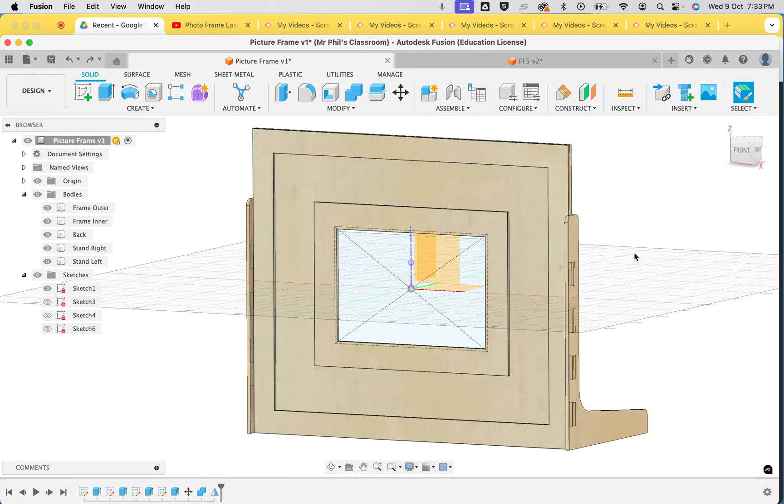Okay, so the last step in Fusion 360 before we export this to Adobe Illustrator, where we can do more of the artistic side of this project, is to change the parameters of this picture frame so it suits our needs. So I'll show you the picture I'm going to use.

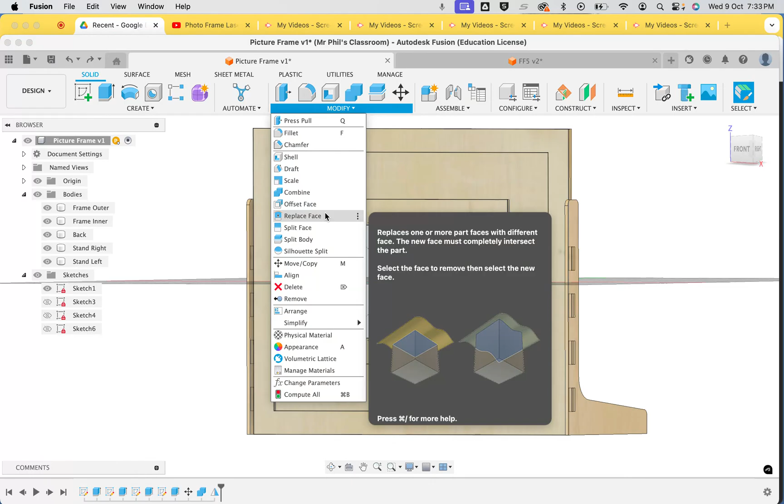...length is actually 176 millimeters, and the width here is 125 millimeters. So in Fusion, I'm going to go modify parameters. So I'm going to make the picture length 176, and I'm going to make the picture width 125.

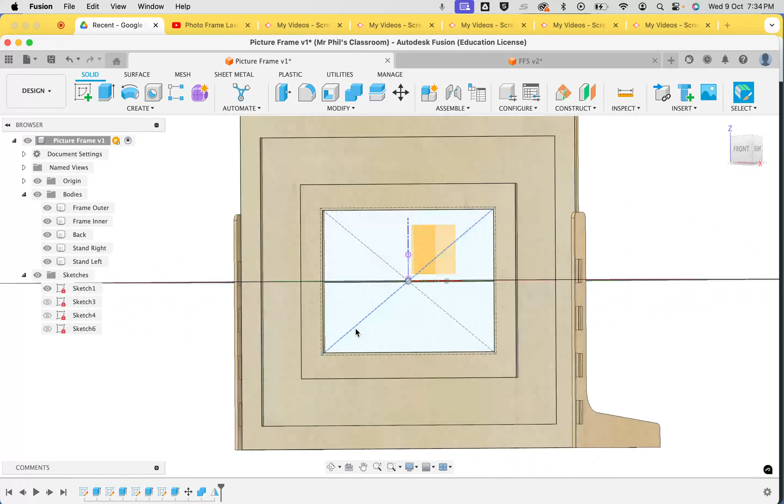And you can see now that the frame is actually changed to accommodate that height. Now that makes the frame look pretty big, so I'm going to actually go in here. I think what I'd like to do is I'm going to go get the art space.

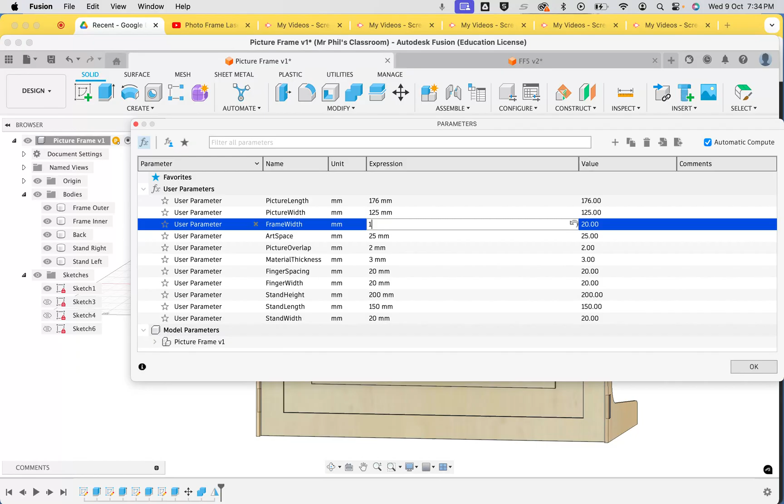I don't think I need that much art space, so I'm going to make the art space 30, maybe even 25. And what I might even do is get my frame width. I might go for like a 10 millimeter frame width. Let's see what that looks like. So that looks pretty good.

Now I'm not sure how this is going to work, but I'm thinking that my finger joints are now looking really kind of big and chunky there. So what I can now do, let's go modify parameters. And what I'll do is I'll go and change the spacing on the finger joints to 10.

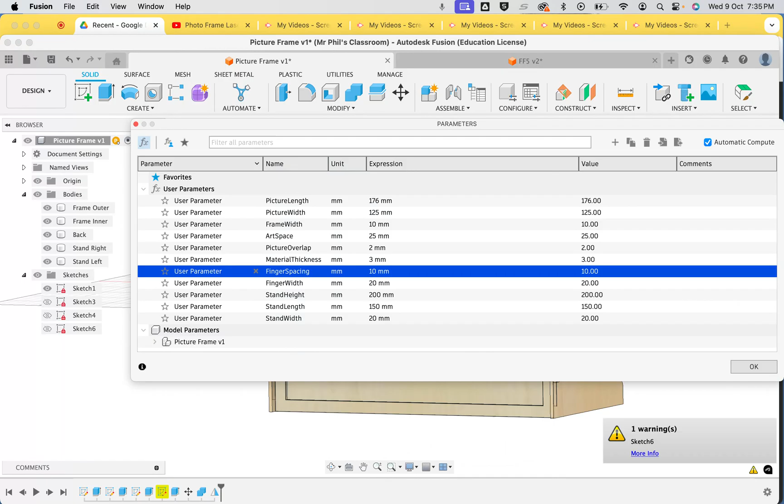Oh, that messed up a sketch, so that might not be quite as possible as I thought. Let's try modifying...

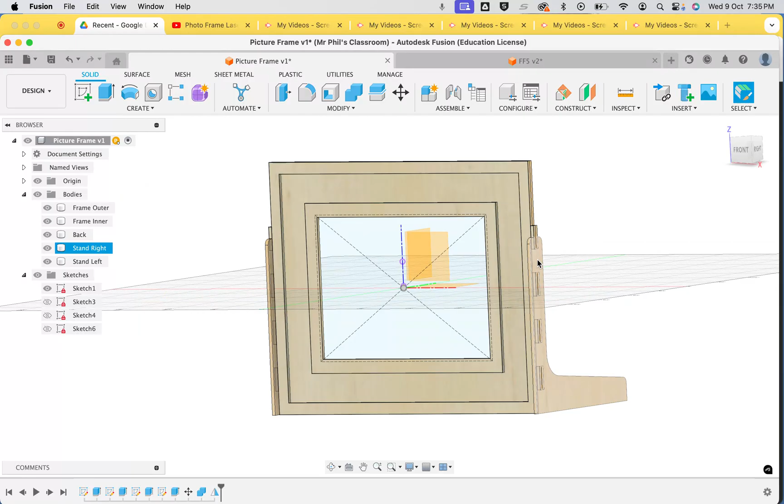...let's just try modifying the stand height. Let's make that 150. Let's see if that works. Okay, oh, that's better. It's a little bit short, so let's make it maybe 170.

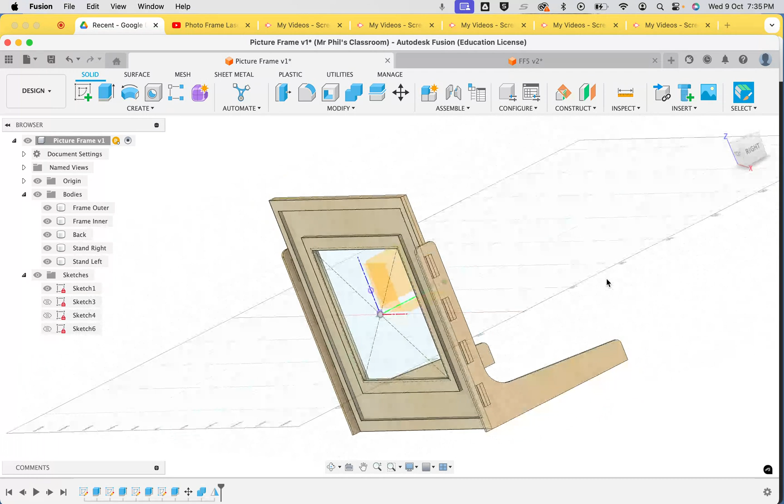So that's the last step, is to just get all of the picture frame looking just the way you like it. Once we export it to Adobe Illustrator, you're not going to be able to bring it back into Fusion with much ease. So make sure you make all of the adjustments you want.

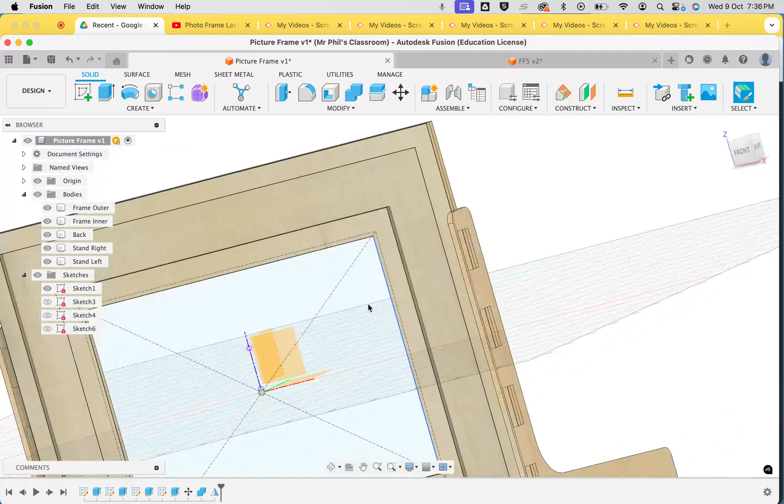You could potentially, if you wanted to, add, like if you wanted to round the edges here, you could add a fillet, something like that, and do whatever you want to make it your picture frame. And then next tutorial I will teach you how to export it to Adobe Illustrator.